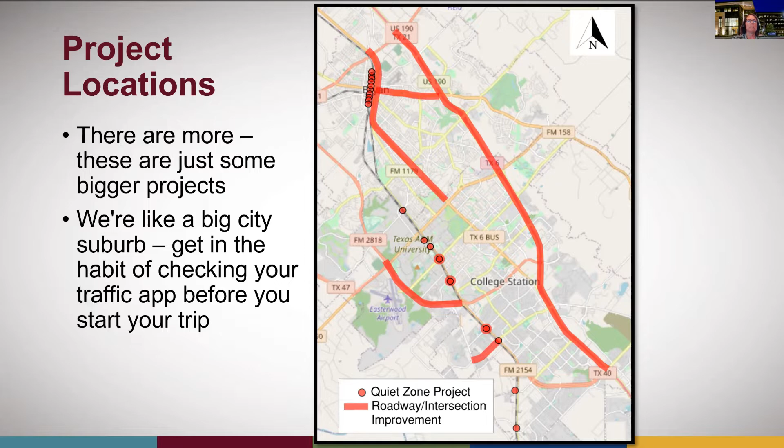So first up, we're going to talk about the 2818 Super Street project. It goes from Stotzer Road on the north end, or just north of Stotzer. I think if you can see my cursor, it's here. So Stotzer on the north end down to Wellborn on the south end.

Since I'm still somewhat new to the area, I find it useful to get a visual on the locations of each of the projects. So I put one of these maps in with the projects highlighted in red at the beginning of each discussion so we can follow along with where I'm talking about. I am going to spend a few extra minutes on the 2818 project because it's ongoing and it's a rather large project and it's got some new and interesting concepts.

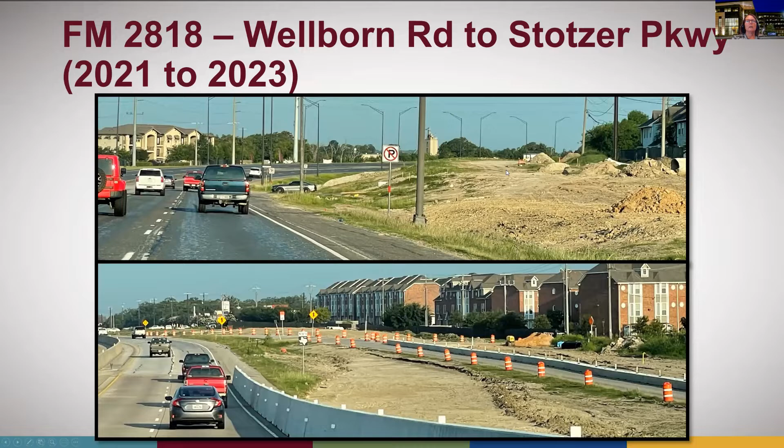But you may have noticed that the project is under construction. Most of the work is happening outside the roadway footprint over here on the east side, and that's in preparation for the new northbound lanes.

The 2818 Super Street project has a significant capacity and safety element to it. The carrying capacity of the roadway will be enhanced by converting it from a 5-lane highway, shown here in the center of the page, up to a 6-lane roadway. Just kind of think of it like there's going to be a wide median, so it's frontage roads separated by a freeway in the middle. That's what the footprint will look like, although there won't be a freeway in the middle, it'll just be the frontage road at this point.

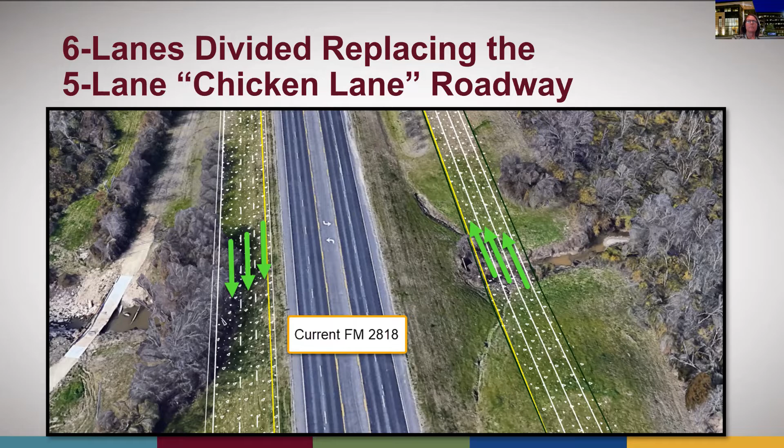Here are the intersection elements of the project. On the north end of 2818 is the Stotzer Parkway underpass. We're going to be lowering 2818 by 2 to 3 feet in order to attain the 18-foot required clearance for underpasses. Then at the Bush, Luther, and Holleman intersections, they are going to be upgraded to Super Street intersections, or a restricted crossing U-turn design. I'll show you in just a minute what that actually means. But the big deal here is that the design reduces the number of conflict points at the intersection from 32 down to 14 at each location, and the operations are also greatly simplified.

And then finally, there's a new flyover bridge at the Jones Butler location shown here. What that will do is it will connect Jones Butler Road on the north end to Holleman South down here.

But this little piece that's missing currently will be constructed as part of a future College Station project. The 2818 overpass will be constructed, as well as the small short section of roadway underneath. And then finally, some new pedestrian and bicycle facilities are also included with the roadway enhancements.

The timing for this project: phase 1 is utility clearing work, as well as preparing for construction of the northbound lanes, which is underway. Phase 2 and 3 will be the construction of those two new roadway beds, northbound and southbound, that we saw on the last slide, and that's expected to go through the next couple of years. Phase 4 is the work done on the inside, where they'll be constructing some crossover roadways and U-turn roadways. The final project is expected to be complete in the summer or fall of 2023.

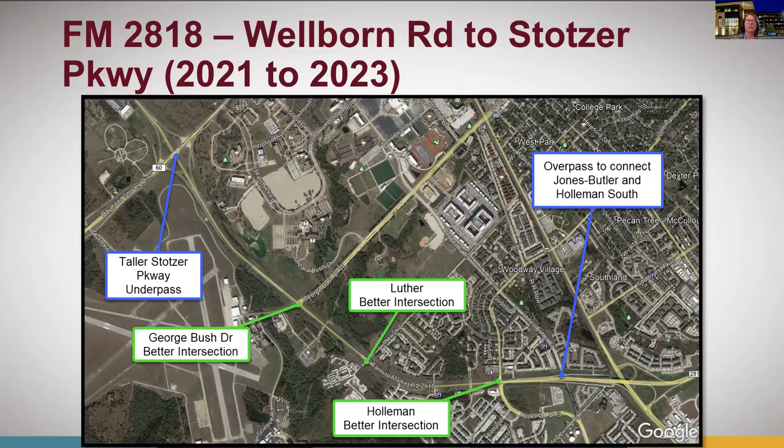Now, when looking at how traffic moves through or makes left turns off of George Bush, it'll be quite a bit different. If you want to make a right turn, you make a right. If you want to make a left turn at the intersection, you'll follow the blue lines: make a right turn onto 2818, followed by a U-turn just past the intersection, and then continue straight through to make your left turn movement. If you wanted to go straight through the intersection, you'll follow the red lines: make a right, a U-turn, and then another right turn. So the moral of the story is just go right if you're on those cross streets.

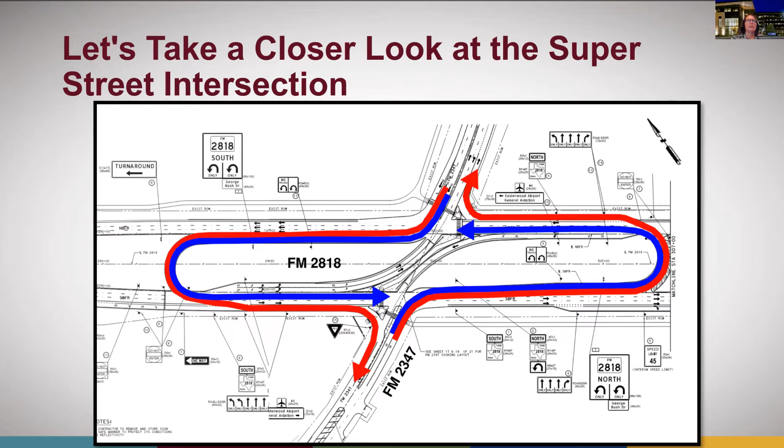One of the biggest advantages of these super street intersections is the signal operations are greatly simplified. Here on the right side of the screen, we show the existing signal operations at George Bush Drive. We first serve the north and southbound traffic on 2818, followed by the left turns from 2818 onto George Bush, and then we serve eastbound George Bush, followed by westbound George Bush.

This graphic on the left shows the phasing for a super street. In phase 1, the northbound and southbound traffic goes, delineated by these green arrows. That's followed by phase 2, which would be your left turns on 2818, as well as all those right turns and U-turns we just talked about. In traditional intersections, those protected left turns or exclusive lefts we saw on the top right are their own phases. So remember, each phase includes yellows and all-reds, which takes time that nobody gets to use, and that time adds up when you look at 6 and 8 phase intersections.

Comparing the two: if we run a 120-second cycle length - and cycle length is the time it takes to serve all of the traffic movements at an intersection in a circular movement - going through and serving everything would take 120 seconds. With a super street intersection, you could give, say, 90 seconds to phase 1, and the remaining 30 seconds to phase 2.

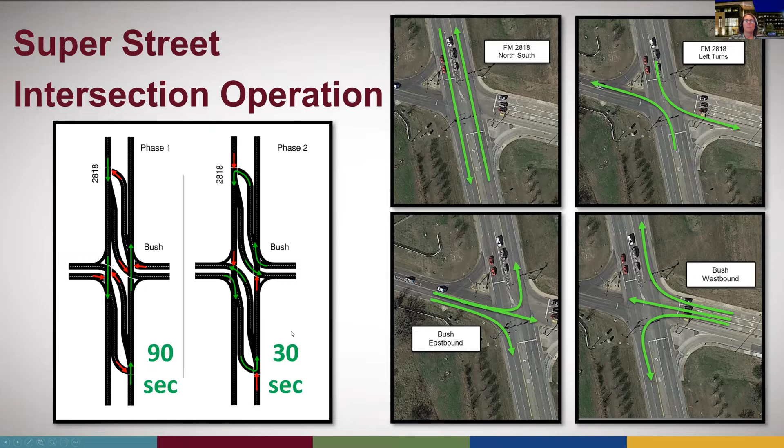With that current operation, the timing breakdown would look something like this. The super street allows the same amount of green time for the westbound Bush movement, at the same 30 seconds. But during that time, you're also serving these left turns on 2818 as well as the eastbound Bush, so those two directions of travel actually get an extra 10 seconds of green.

But a huge difference is actually this north and southbound movements, where they're getting actually 80% more time, going from 50 seconds to 90 seconds. And that's a big deal when we're trying to move a lot of people like we've got on 2818.

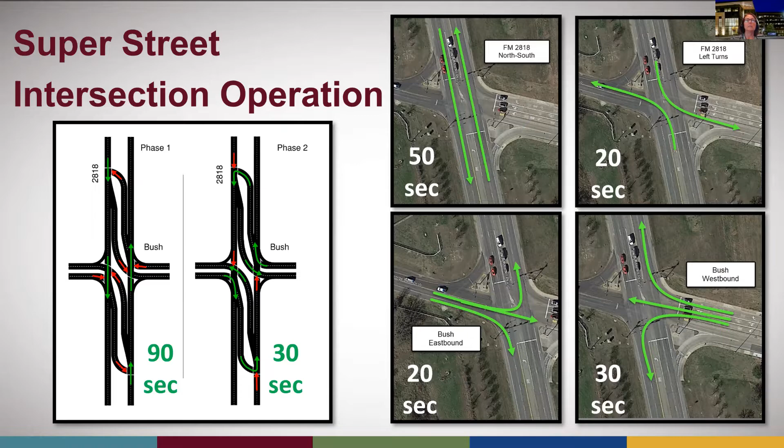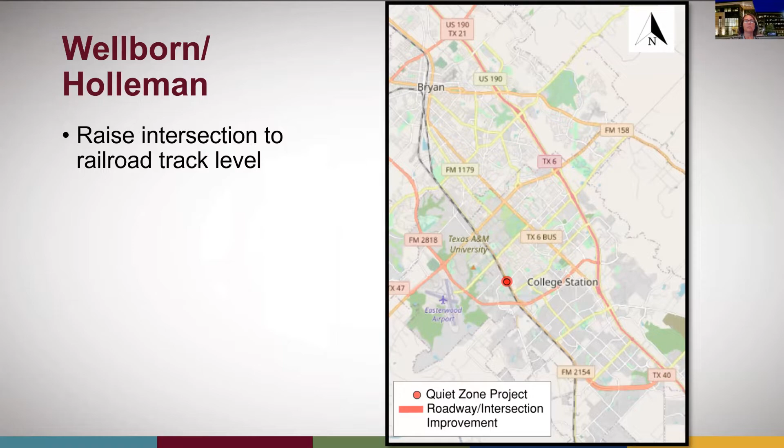All right, so now moving on to the Wellborn-Holleman intersection, and this is an intersection raising project. You can see the location here in the red dot. The gist of this project is there's a significant elevation difference between the railroad tracks and the intersection, so eastbound and westbound traffic do not run very efficiently as people try to navigate those severe grade breaks. The idea is the intersection will be raised up to more closely match the railroad tracks. In addition to that elevation change, the west leg is going to be widened to add a right turn lane, and safety improvements will be made to support activating a quiet zone at this location.

So utility prep work is currently underway. There are some daily right turn lane closures on northbound traffic, and you can see those with the cones kind of off on the right side of that picture. You can also see that elevation difference that I was mentioning with that white car that's sitting there on Holleman. The big deal with this project is that it's going to require about a month to a month and a half complete closure of the Wellborn-Holleman intersection.

That work was supposed to happen in May, June, so right now, but if you've driven through the area, you know it hasn't happened. We ran into a little bit of an issue in getting the necessary approvals from the Union Pacific Railroad to do work in their right-of-way. So that closure has been delayed and is expected to happen next summer to take advantage, again, of fewer vehicles on the road and less disruption to the traveling public.

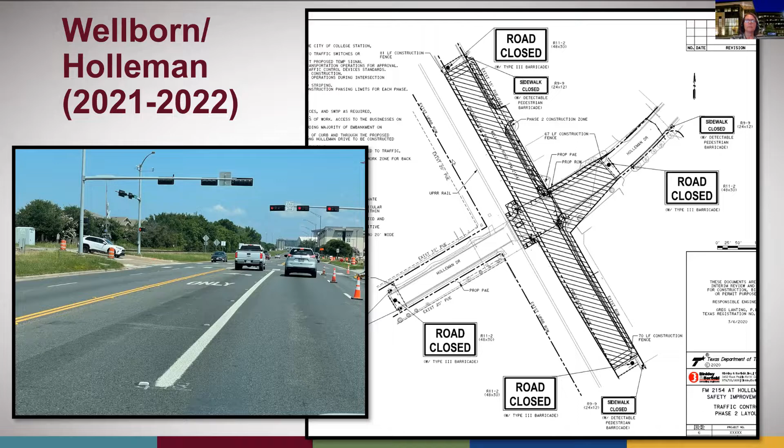Next we're going to talk about quiet zones. For those who don't know, train engineers are required to sound train horns in a certain sequence at each crossing to alert drivers that they may be using the area or the crossing. Unfortunately, it's not just those drivers that hear the whistles, it's all of the people who are living or staying in the area - they also get the joy of hearing those whistles. So there are quite a few efforts underway throughout the area to quiet those pesky trains.

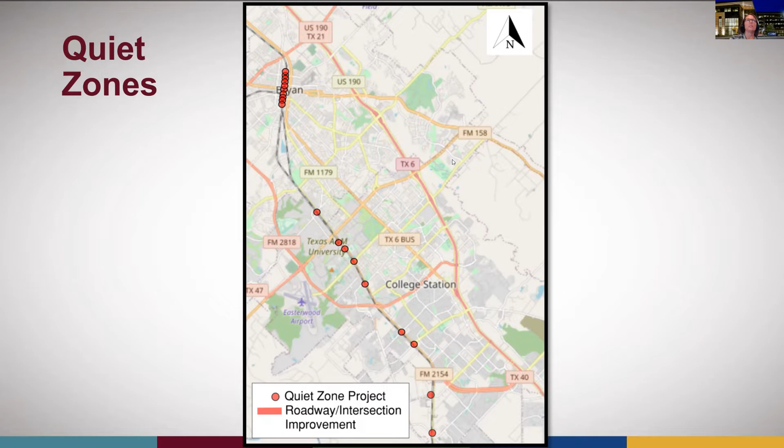You can see here that the project stretches from downtown Bryan all the way through South College Station. In order to establish a quiet zone, improvements must be made to the crossings to maintain safety thresholds. Just think about, have you ever gone around the gates at a railroad crossing? That's something they're really trying to avoid. A good example of a safety enhancement is installing, say, 4 gates on the roadways approaching, coming from both directions on each side of the railroad, and then also medians to keep people from going around them.

So in the interest of keeping the presentation moving forward, I'll just say that the process is rather lengthy and requires multiple reviews and approvals from the railroad, as well as the safety improvements, in order to get those quiet zones established.

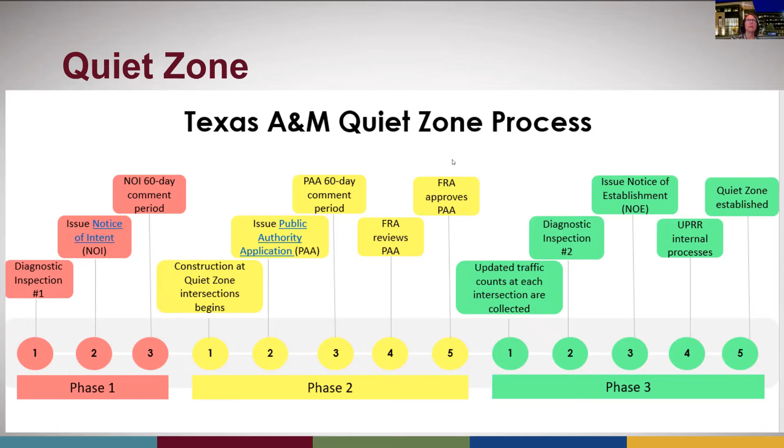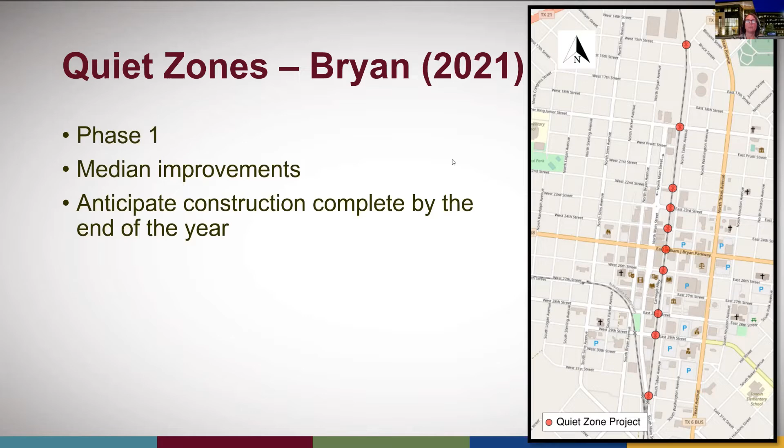Phase 1 of the Bryan Quiet Zone project includes 10 intersections in downtown. About 2 weeks ago, the Bryan City Council awarded its first contract to begin modifying the city streets at these railroad crossings. The modifications include installation of medians, and people should expect to see construction with some lane restrictions or closures beginning next month. Weather permitting, the medians will be finished by the end of the year. Bryan also has plans for about 15 additional quiet zones in the downtown area, so once they finish these 10, there still will be more to come.

The City of College Station does have an active quiet zone at the Greens Prairie Road crossing, shown down here at the bottom in blue, and is in either design or construction stage for 4 other locations. I already talked about the Wellborn-Holleman intersection, and I'll discuss a couple of those other locations here in just a minute. The Royder/South Dowling crossing, which is in this area - there isn't an active project for that quiet zone yet, but it is one that they're projecting to look into in the future.

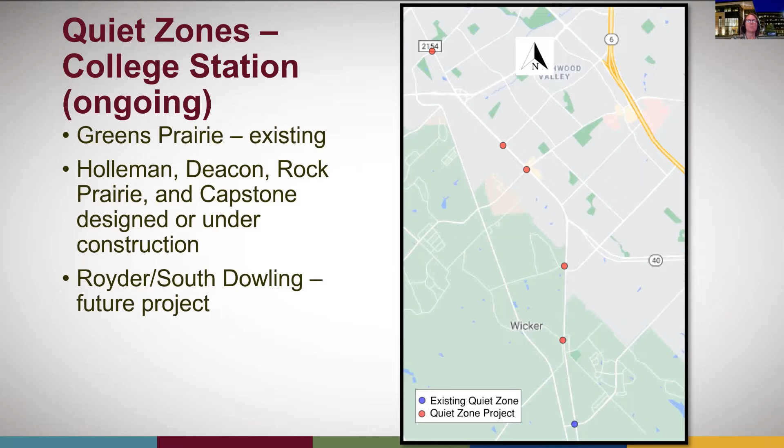Texas A&M Transportation Services is working on quiet zones at 4 locations, and they were in the middle phase of the quiet zone process that we saw with the bubble diagram. The current work includes installation or modifications of medians and gates.

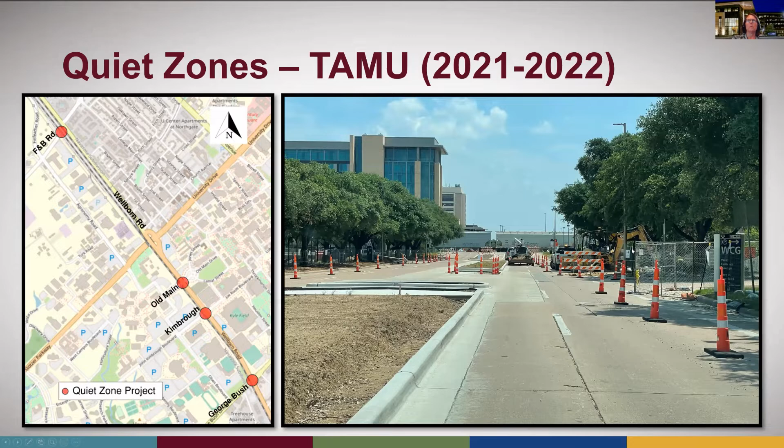At this Kimbrough location, shown here, there is some additional work going on to address pedestrian and bicycle needs to get them from West Campus into Main Campus. These improvements will help people access the passageway under the railroad, under Wellborn Road. The passageway is just off here to the right.

With sidewalks and streetlights, the project will include adding lanes to the west approach across the railroad tracks, so you'll have 2 through lanes, and extending the turn lane. This will help tremendously in increasing the number of vehicles that can get through the intersection. Median modifications and a new signal at the Wellborn intersection are also included, and some of those improvements address the quiet zone applications I mentioned earlier.

The City of College Station is expecting that the bidding process will start towards the end of this month, and then construction can start in August or mid-September.

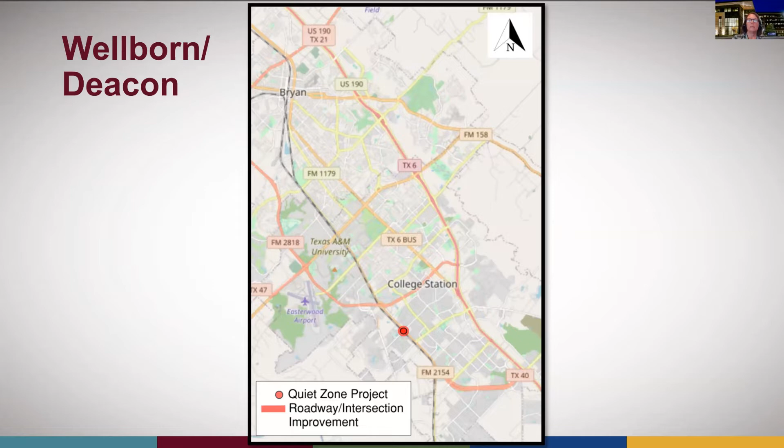Just up the street from this location, there's also a project for Wellborn Road and Deacon. This project may sound familiar. It involves raising the intersection up 5 feet so that it's at grade with the railroad tracks, and then making intersection improvements to enhance the flow.

Once this project is complete, the Cain Road railroad crossing is actually going to be closed. Typically the railroad wants to close 1 crossing before creating a new one, and sometimes they even require a 2-for-1, so you have to close 2 locations before you can get a new crossing approved.

College Station is anticipating having a railroad approval for this project or an agreement in the next month or so, and then we'll bid the project out 1 to 2 months after the agreement is finalized. If all goes according to plan, this project will go to construction later this year and will last about 1.5 years to complete.

This project will require some closures as well as lane and turn restrictions throughout the project, particularly on Deacon, and then some restrictions on Wellborn Road as they rebuild the roadway. But unlike Holleman, the plan is not to close this intersection. They're going to do the elevation changes and raise up the intersection while keeping traffic moving on Wellborn Road.

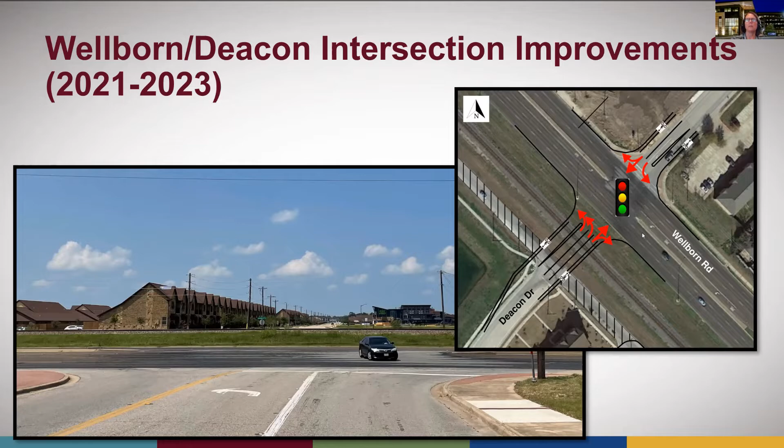Next is the Texas Avenue improvements in the city of Bryan. The limits of this project are just north of State Highway 21 down to University Drive.

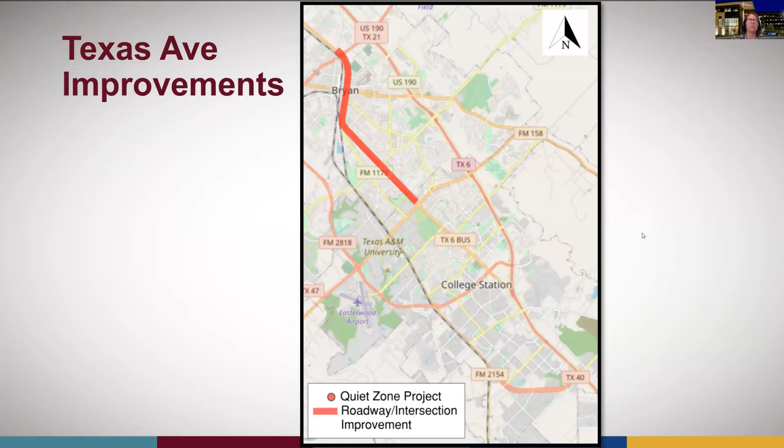This project is under design and will include safety and mobility enhancements. Some potential improvements would include reconstructing the intersection of Texas Avenue and State Highway 21, possibly putting in raised medians to reduce turning conflicts, some landscaping and tree planting, and shared use paths and sidewalks to help pedestrians and bicyclists get around or along Texas Avenue, with the ultimate goal being to reduce the number of conflict points, because that's where the crashes happen. They want to make sure everybody gets to and from their destination safely.

The picture on the top right shows the current condition of Texas Avenue, just north of Villa Maria, with that two-way left turn lane in the middle. The pictures on the bottom are of University Drive and Briarcrest, just to give you an idea of how median modifications can be incorporated into the corridor.

Phase 1 of the project is around the State Highway 21 intersection, and medians and other improvements are anticipated at that location. They're hoping to advertise that project later this year.

Phase 2, which is a longer stretch of it, has public involvement kicked off, and they're starting to contact business owners for those improvements. They're anticipating a fall 2022 advertisement for that project. There haven't been any public meetings yet on the project with the median layouts, and that's expected to happen probably later this year.

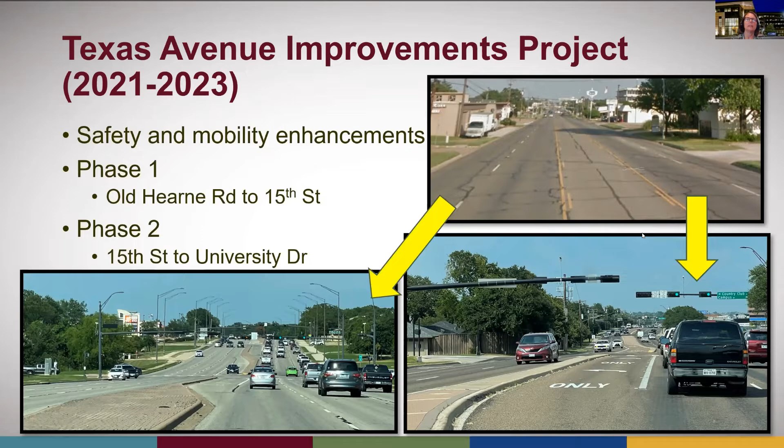I'm going to just pause for a second because I know there's a couple of chats. Oh, and it looks like Tim has already responded. Okay, sorry, we'll keep going here.

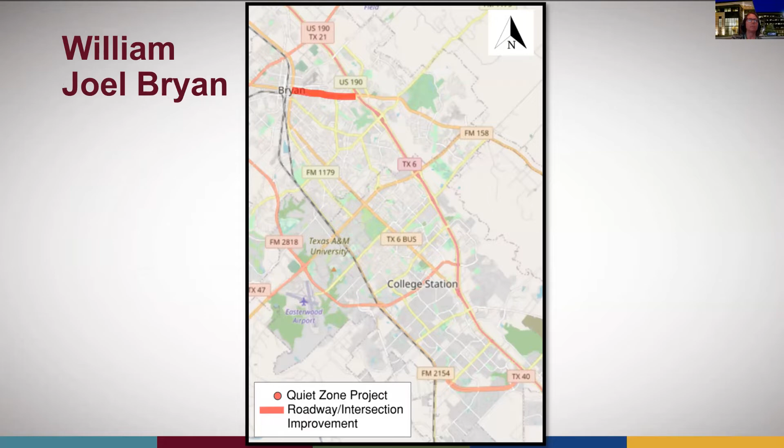Next up is the William Joel Bryan project. The city of Bryan and TxDOT are also working on an enhancement project for William Joel Bryan between State Highway 6 and Texas Avenue. This project is in the design phase and expected to advertise for construction next summer.

The project includes speed reduction elements such as narrower lanes or roundabouts. There'll be some limited landscape and other aesthetic enhancements, and shared use pathways for bicycles and pedestrians.

There are some pretty unique features with this project. You can see here on either end of Sue Haswell Park, there are 2 roundabouts. Those will serve as gateway features into the area. To help assist pedestrians in getting to and from the park, as well as navigating those roundabouts, there are actually 6 HAWK hybrid beacons planned for the project, and then 2 new signalized intersections that will also help in circulating traffic, but also getting pedestrians back and forth across William Joel Bryan.

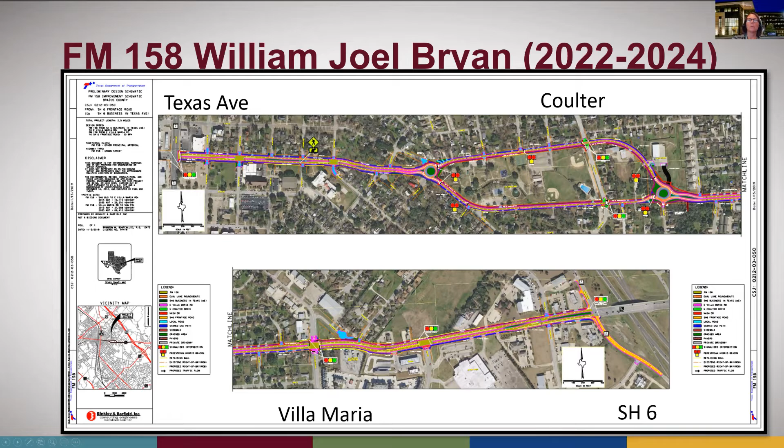Here's a zoomed in view of a roundabout on the east end of the project. You can see these 2 new HAWK locations that are part of the crosswalks for crossing William Joel Bryan. There's also reconnection of the June Street intersection, and they'll be removing a section of the Dollar General driveway and reconfiguring it so that it accesses just past the roundabout, and they can add in a right turn lane that will help with the operations of the roadway.

I haven't seen a lot of HAWKs around town yet, but unlike Tim, I haven't traveled every inch of Bryan College Station yet. For those of you who haven't heard of HAWKs, it stands for High Intensity Activated Crosswalks. We will have a quiz later. They're used to assist pedestrians in crossing the street while providing the least amount of disruption to traffic.

This graphic shows how a HAWK operates. When there isn't a pedestrian in the crosswalk or they haven't activated it yet, the heads remain dark. Once a pedestrian activates a HAWK and it's ready for them to cross, it will transition to a flashing yellow, then a solid yellow, and then a double red. At that time, the pedestrian is given the indication that they can walk across the street.

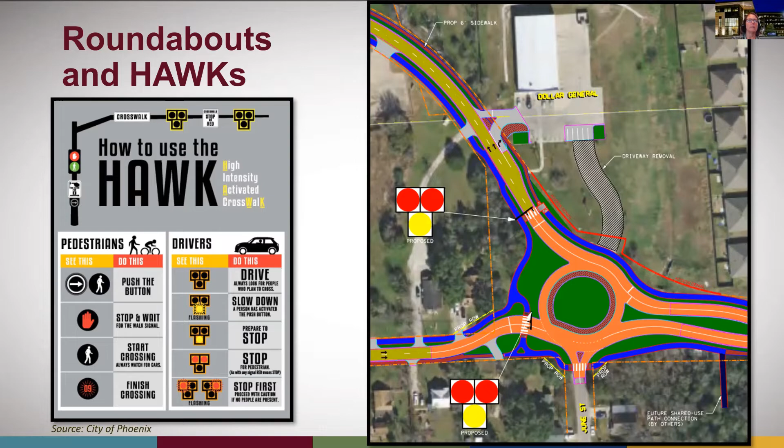Once the walk time has finished and they're in the clearance time for pedestrians to cross, the beacon will transition to a flashing red, or a wig-wag, going back and forth. At that time, drivers who are sitting there, if the pedestrian has cleared the crosswalk or street, can actually proceed through the crosswalk after they've come to a stop. So if you're approaching it, you stop, and if there's no pedestrian there or they're already across the street, you can proceed through the intersection, which is what makes it more efficient than a traditional traffic signal, where you have to wait regardless of whether the pedestrian's finished crossing or not.

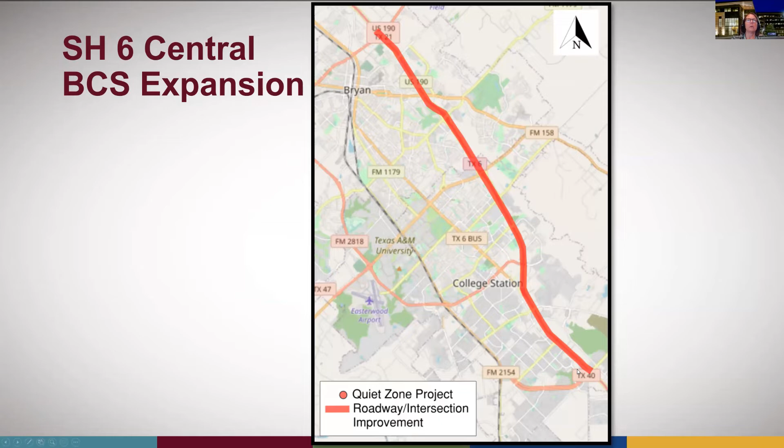Moving on to the State Highway 6 Central BCS Expansion Project, one of the highest regional priority projects in the area. Improvements are planned between Highway 21 on the north down to Fitch on the south end. A virtual public meeting was held in May of this year, and TxDOT is processing the comments they received.

The project presented includes enhancements to improve both mobility and safety in the corridor. The big mobility features are widening the corridor from 4 to 6 lanes, plus various frontage road improvements. One feature on freeways that presents a large operational and safety challenge is the ramp areas where you've got a lot of weaving of people coming to and from the freeway onto the frontage roads, or frontage roads onto the freeway.

This project will address those areas by connecting the on and off ramps with continuous auxiliary lanes, and also adding collector distributor lanes in the area of Rock Prairie Road to 2818, or Harvey Mitchell Parkway.

The Texas Avenue interchange will also be reconstructed to eliminate the left turn exits. All of the work in phase 1 is expected to be completed within the current State Highway 6 right-of-way, so they won't need additional property to complete that work.

TxDOT is still working on the design for this phase, and expects to advertise for construction in the fall of 2022. Phase 2 will come later and is really a potpourri of interchange type improvements.

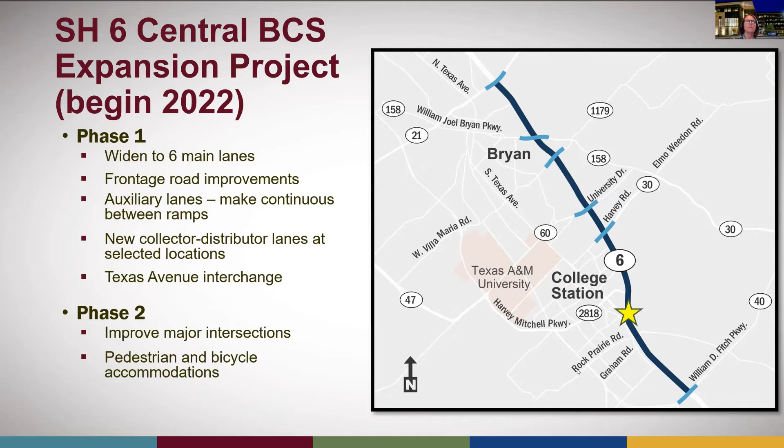As previously mentioned, phase 1 includes construction of collector distributor lanes from Harvey Mitchell down to Rock Prairie Road, as well as the Texas Avenue State Highway 6 interchange reconstruction.

The main lanes of Highway 6 will continue in this middle area, and they will be on a new bridge that goes over the new exit for Texas Avenue.

Instead of the left exit we're used to for getting to Texas Avenue, people will now exit off to the right into these collector distributor roads, then come off to the left from there, travel underneath Highway 6 and other ramps, and connect into the at-grade intersection.

These collector distributor roads will help transition traffic from the freeway to the frontage roads without causing too much interaction between the two and messing up traffic with slowing and weaving operations. These are really beneficial in areas with closely spaced intersections or on and off ramps.

The interchanges we talked about - here's the Rock Prairie Road interchange, it's kind of whited out, not as colorful, because those will be done as part of a later phase. So a lot of the collector distributor and frontage road improvements will be part of the first phase, and the interchanges are later phases.

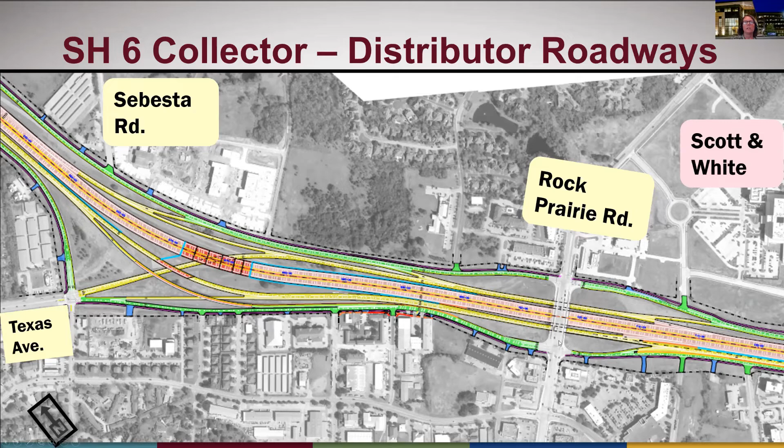Last but not least, the Bush-Wellborn intersection project. If you haven't heard of this project, then I think we need to have a little conversation with Tim, because he told me he has talked to everybody about it.

And about 35 feet down is where George Bush would intersect with the traffic that wants to turn off of Wellborn Road.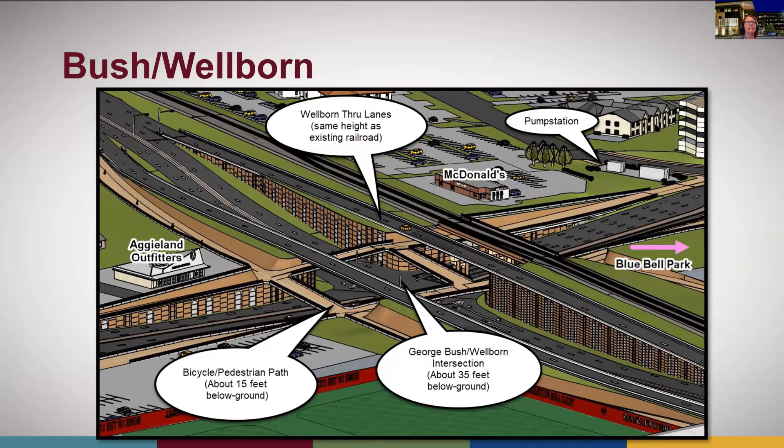So I know this is off topic, but I would be remiss if I didn't take a few moments to talk with everybody about the upcoming Aggie football season and everyone's favorite topic about football, traffic.

These are just a few changes and reminders and maybe a couple of notices for everyone. Starting next month, Aggie Park, the big grassy area between Houston and Coke Throckmorton, north of the Foundation Building and south of the University Center Garage, is going under construction. They're going to be creating some great park amenities, so it will be closed for that construction. There will still be tailgating options in other areas, and if you have a parking permit, you can use the area within 15 feet of the curb for tailgating, but don't use the sidewalks or the streets around the perimeter of the lots.

We talked about the quiet zone projects earlier, but pedestrians should use the Wellborn Road underpasses at Kimbrough and Joe Routt, as well as Old Main. Please don't cross at the street - we spent millions of dollars on tunnels, so please use those.

Similar to 2020, the downtown Bryan location will be the only shuttle operation. On and off campus bus routes will still continue to operate, but if you want to shuttle in to the game, you need to go to downtown Bryan to do that.